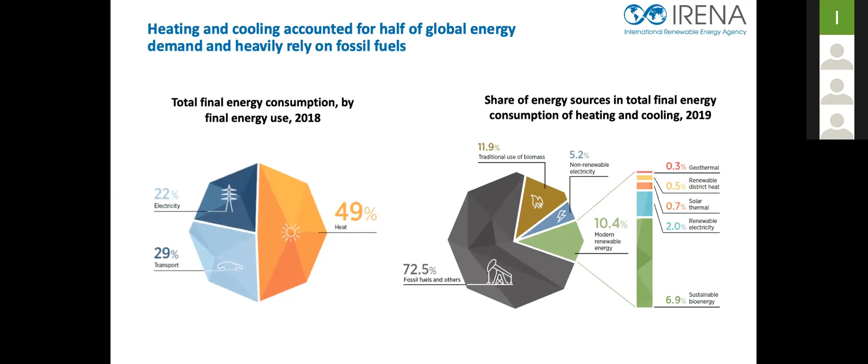Next slide please. The world must work together to prevent and minimize the negative impacts. So the largest emission reduction is needed for industry.

From the slides you can see, from a global perspective, to generally decarbonize the global industry sector would need improvement of energy efficiency, electrification of appliances, and direct use of renewable heat such as biomass, geothermal, and solar heat, and hydrogen for very high temperature industries, and also other measures for hard-to-abate heavy industry. Next slide please.

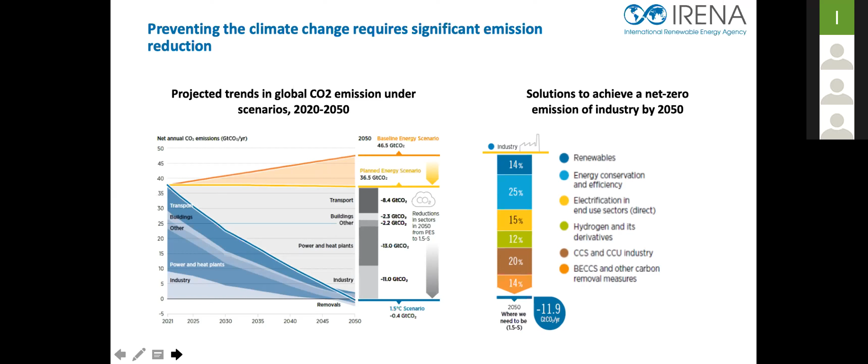At the global level, the industry sector accounted for 40% of total final energy consumption. This share can be different depending on the country context. For example, industrial energy consumption can be very low in European countries, but remains very high in countries with very rapid industrialization. In Vietnam, more than 53% of energy was consumed by the industry sector in 2019, before the pandemic, and the share will keep increasing in the following decade.

So with 40% of global energy consumed by industry, heat consumption contributes around three quarters of that. The rest, one quarter, is electricity. Again, as you can see, fossil fuels provide more than 87% of the total industry heat.

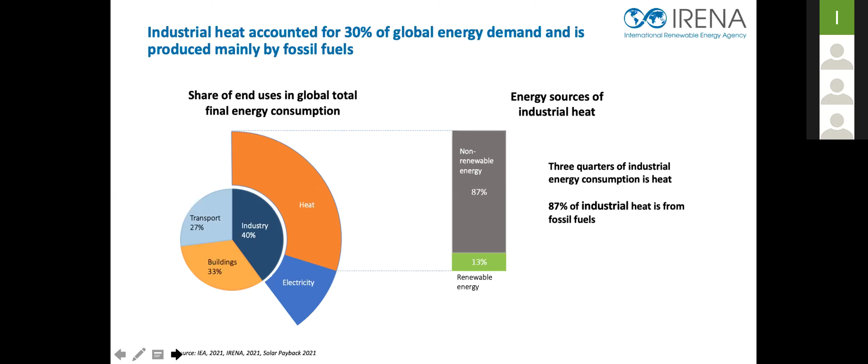Next slide please. More than half of industry heat is actually low and medium temperature heat needs. Here we define all heat demand below 150 degrees as low temperature heat. This could include boiling, sterilizing, cleaning, drying, washing, bleaching, steaming, and others.

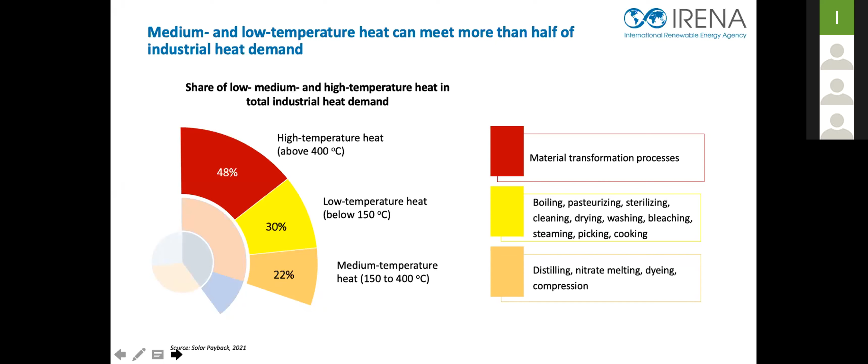And heat needs between 150 to 400 degrees we call medium temperature heat demand. This could include distilling, dyeing, and compression. All heat needs more than 400 degrees we categorize as high temperature heat needs, but this part very much focuses on material transformation processes such as steel and cement industries.

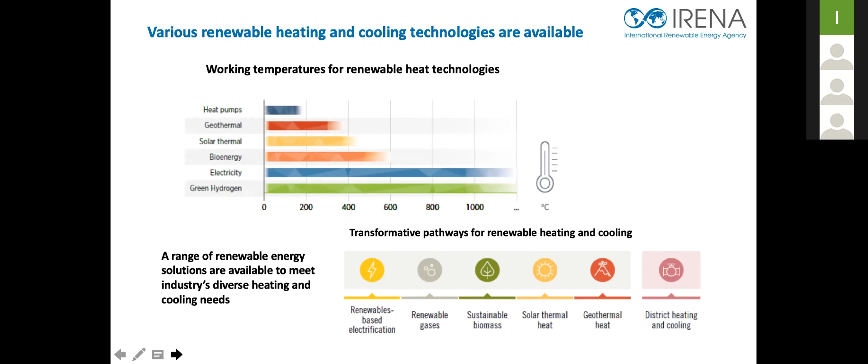Next slide please. Various renewable energy technologies can be used to replace fossil fuels for low and medium temperature heat. IRENA last year identified 5 key pathways from the global level to decarbonize heating and cooling energy use for both industry and residential. Those 5 include renewable energy-based electrification, renewable gases and sustainable biomass, which is very important here, solar thermal heat and geothermal heat, and also district heating and cooling as key infrastructure.

Next slide please. I would like to very briefly introduce 3 key technologies but will not go into great detail. The first is heat pumps. Heat pumps are a very energy efficient technology.

For example, a heat pump with a coefficient of performance, usually a COP of 4, can consume only 1 kWh of electricity but generate 4 kWh of heat. So it absorbs 3 kilowatt-hours of energy from ambient heat, which could come from air, ground, or even water. In some cases, the heat pump can utilize industrial waste heat or industrial wastewater, which saves cost and improves efficiency.

However, the operation cost of heat pumps very much depends on the electricity tariff and requires necessary policy support, which I will mention later.

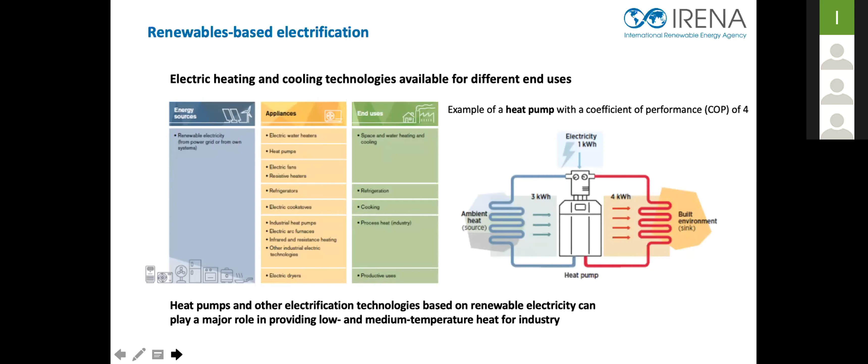Next slide, please. A very important option is sustainable bioenergy, especially for countries and cities with available sustainable biomass feedstock. Some widely used technologies include biomass plants combining heat and power, and biomass boilers. In some cases, for industrial parks and area level, biomass-based cogeneration providing power and heat, or trigeneration providing power, heat, and chilled water, can be a good option to decarbonize the whole area with lower operation cost compared to other renewables.

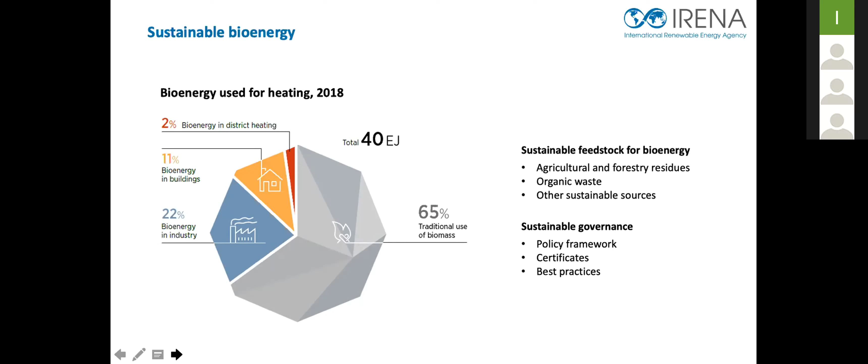However, all biomass use should be based on sustainable feedstock. For example, we recommend utilizing agriculture residue, forest residue, or organic waste. With biomass use, always keep in mind we should minimize negative impacts such as air pollution from burning, and also biodiversity loss, deforestation, or pollution on soil and water.

Next slide, please. Solar heat is another option where there is large potential of solar radiation. Large-scale solar water heating systems can be combined with other solutions to achieve better efficiency and performance. For example, the solar water heater system can be used for preheating and combined with the heat pump to maintain the heat needs for industrial plants.

Based on some analysis by the Asian Development Bank on existing solar heat for industrial process projects, like in China, the analysis found that investment in solar heat projects is less than biomass plants, and the heat production cost is lower than natural gas. Operation cost of solar heat plants is much lower than other renewable options.

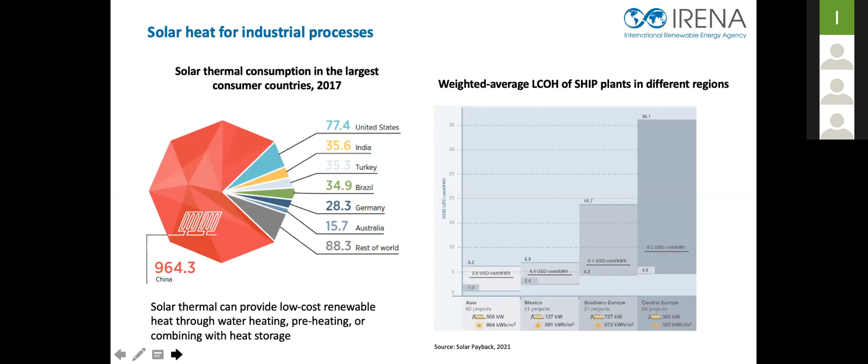Especially if you look at the right side, in the Asia region, the heating cost of existing solar heat for industrial processes projects is much lower than other regions, and it's keeping down. But always keep in mind, commercial level solar heat for industrial projects usually need combination with other technologies to keep steady heat providing, such as electric boiler or heat pumps.

Next slide, please. Companies always need to consider the infrastructure before investing in specific renewable technology, because long-term planning and considering the infrastructure will be necessary to avoid stranded assets. For example, if there are already natural gas networks and sustainable biomass feedstock are very available, replacing natural gas with biogas or biomethane and utilizing existing gas pipelines may be a better option than building a whole new system.

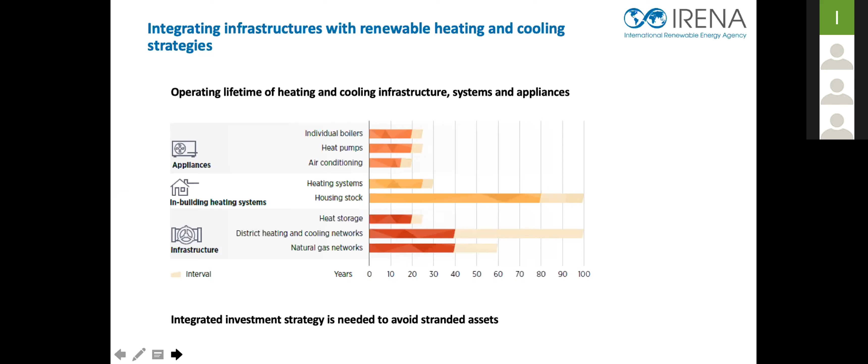Next slide, please. There are 3 models to procure renewable heating and cooling, but in Vietnam and most developing countries, the most common way may be self-generation - that's the only way we can have. In this model, companies need to build their own biomass boiler, heat pumps, or solar water heating system, usually combined with a storage system for self-consumption. In this way, you always need to consider the upfront cost of the system.

But when the market is growing at some stage, companies may also be able to purchase renewable heat or chilled water from utilities, or even renewable certificates, like what we do for renewable electricity.

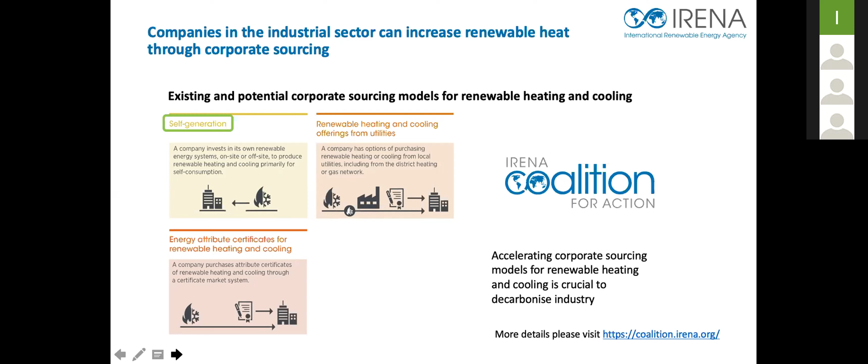Next slide, please. Even with all these technologies available, renewable heating and cooling remain very low because of existing barriers. The barriers companies usually face include, first, being locked in fossil fuels. For example, a company just invested in a very efficient new natural gas heating system, which can last around 25 years, even longer. So for the next 25 years, this company is locked into fossil fuels, the natural gas.

Other barriers also include high upfront cost, lack of access to finance, few reliable and available technologies on the market, or long and complex government approval processes. Government policy is necessary to enable and accelerate the deployment.

Just to give one example, as I mentioned, heat pumps will be very important at the global level for future decarbonization of industry heat. Heat pumps using renewable electricity are very efficient and low carbon. But the government needs to provide enabling policies, such as time-of-use electricity tariffs and proper mechanisms to enable companies to purchase renewable electricity.

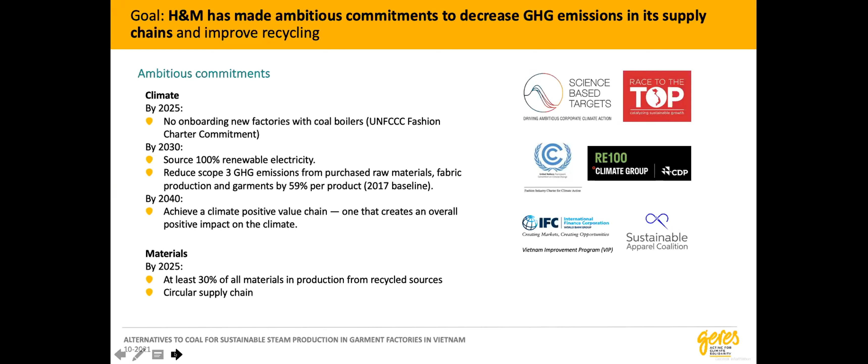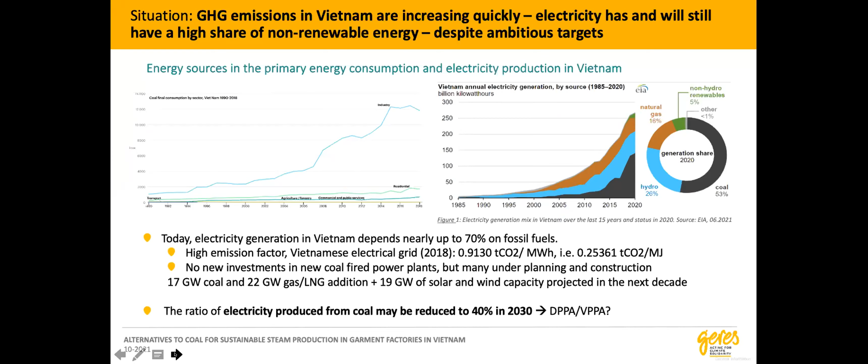This is the big picture that you all know, so let's not spend too much time on it. Coal consumption from industry has been rising quite fast in recent decades, and the electricity sector is taking strong commitments to decarbonize, but it's not going to happen tomorrow, and it's not going to be total. So electricity is a good option, but we have to remember it won't be fully clean tomorrow.

Next slide please. We know in more detail that a large part, about three-quarters, of the energy consumed by industry in Vietnam is also for heat. What we saw reviewing the boiler landscape in Vietnam is that in the garment sector, we mostly have coal, biomass, and also oil and fabric waste boilers. Electricity is a bit more marginal, so coal and biomass are much more present.

Vietnam has high resources of coal, especially anthracite, which is mined in the north, but they also import a lot of coal from Indonesia and Australia. In our research sample, 80% of factories produce steam from coal. All the factories we studied produce only steam, and even though they need hot water, they inject steam to produce it. So we had only steam production from either coal or fabric waste—that was our sample.

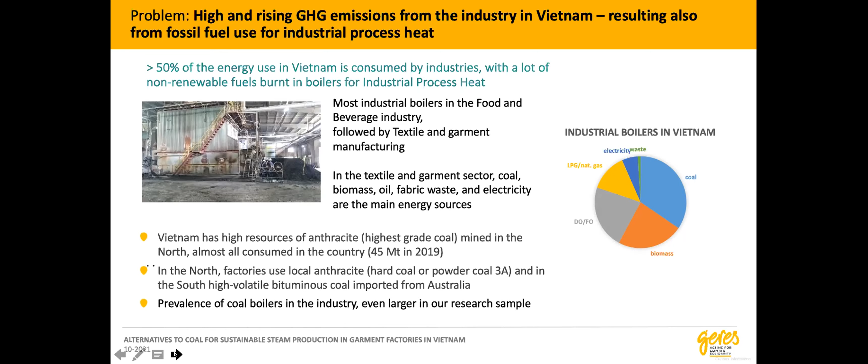Next slide, please. Let's not spend too much time on the process, but I want to highlight that we conducted this study during the lockdown, so we could not visit all the factories. There were a lot of phone calls, and only a few interviews done in person—most of the job was done through phone calls from Cambodia, Vietnam, or Taiwan. That is a strong limitation, and we are very open to all comments and suggestions because we know it's a significant limitation.

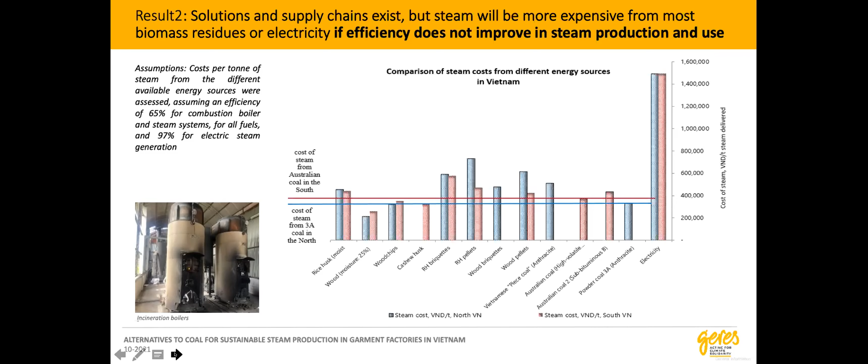So again, it is about the sample. In our sample, we had factories with very high needs of steam and others with low needs. We had 3 to 4 factories that had a large use of hot water for washing and dyeing at different temperatures. And most factories had relatively new boilers.

So we're facing the challenge of making the decision of investing in new boilers. We had only one factory with very, very large boilers that has already amortized. We really hope it is an opportunity for them to move forward and investigate what they can do in investing in new boilers.

What was also surprising for me is that we did not observe any co-firing process in any of the factories, because the first step, the easiest step, is to mix biomass with coal, and that would reduce your emissions already. That's also a good way to get familiar with your biomass supplier, to see what has the appropriate quality, what is the reliability, how the prices are going to vary along the year. So we were surprised there was no initiative just to try it, just to start reducing greenhouse gas emissions and to start understanding how the biomass supply can work.

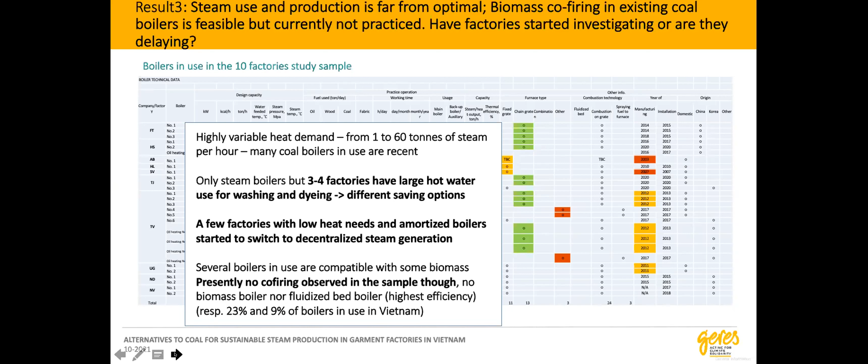So the challenges are on investment, because if you want to mix biomass and coal, you can usually do it in your coal boiler. But if you want to switch to 100% sustainable biomass, it may require investing in expensive boilers. I just want to say very briefly that, generally speaking, a good biomass boiler is not necessarily more expensive than a good coal boiler. You have different technologies, but you also have different technologies for coal, and the most efficient are generally also the most expensive - but it's the same challenge as for coal.

So our recommendation would be not only to try to reach the highest efficiency with the boilers themselves, but also to have a look at the use of the heat, because in some cases, doing everything through producing steam and using the steam either for ironing, or to produce hot water, might not always be the most efficient option - it depends, sometimes it is. But mostly we see that many factories still haven't optimized the use of heat. They have a variable load, and sometimes they produce heat in a more or less constant way, even day and night. So there is already much to do in saving heat and producing less, and then you can afford maybe a slightly more expensive fuel that would be sustainable.

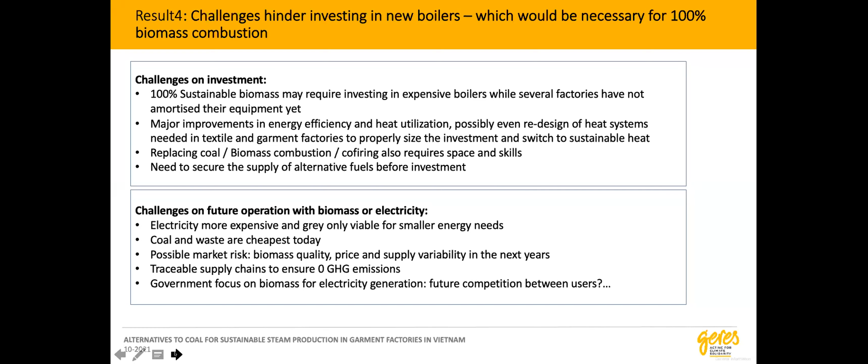So those were the different options we were seeing for a switch to sustainable heat. First, co-firing as a first step, then burning biomass residues in incineration boilers for factories that were using fabric waste. Decentralized electric steam production can of course be combined with solar PV or with any kind of PPA, even distant PPA. Solar heat, I think, was very well introduced and explained by Mr. Jinley, so I'm not going back to this question, but of course it would be great to see more pilots in the garment sector using thermal heat as well.

Of course, when you do such a small study, you see many options and ways for more research and more action to understand better and guide further action. We really encourage factories to conduct an assessment of their heat use, steam production system, and steam distribution. And we really encourage close monitoring of any change when they switch to decentralized electric steam, or when they introduce water recuperation, water reuse, or hot water recycling, to really document how much they can save through these different switches.

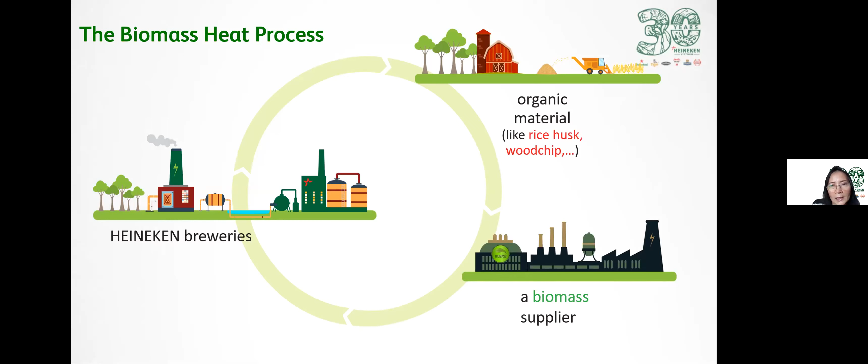Quy trình sử dụng nhiệt năng biomass tại nhà Heineken Việt Nam khá đơn giản. Chúng tôi sử dụng chủ yếu là vỏ trấu và wood chip, những vụn gỗ, đây là hai nguồn chính. Sau khi nguyên liệu hữu cơ này được chuyển giao cho nhà máy biomass thì nhà máy sẽ sử dụng để tạo ra heat, và hơi này sẽ được truyền qua đường ống để đến nhà máy bia Heineken Việt Nam.

Hơi này được dùng ở nhiều công đoạn khác nhau, như nấu bia hoặc khử trùng. Đối với Heineken Việt Nam, việc sử dụng nhiệt năng biomass sẽ đem lại những giá trị cho cả kinh tế, xã hội và môi trường.

Về xã hội, chúng tôi đóng góp tăng thêm thu nhập cho người nông dân cũng như cho các nhà buôn vụn gỗ. Về môi trường, sau khi sử dụng nhiệt năng biomass đã giúp giảm tới 50% khí phát thải CO2 của các nhà máy chúng tôi. Còn về kinh tế, khi chúng ta cùng chung tay phát triển một nền công nghiệp năng lượng tái tạo thì rõ ràng chúng ta sẽ tạo thêm thu nhập cho nền công nghiệp này.

Và đây tôi xin chia sẻ những cơ hội cũng như những thách thức khi cụ thể là Heineken Việt Nam trong vấn đề sử dụng nhiệt năng tái tạo, nhiệt năng biomass.

Cơ hội thì chúng ta đã thấy ở phần chia sẻ trước đây, biomass là một nhiệt năng khá dễ sử dụng tại Việt Nam. Nhìn chung là bởi vì thị trường có sẵn, công nghệ có sẵn, nguồn nguyên liệu của biomass cũng có sẵn, giúp giảm thiểu CO2. Và cái risk đó, như bản phân tích của người chia sẻ trước tôi cũng nói, chỉ trong phần đó chúng ta nhìn thấy tất cả các mục đều là màu xanh, chỉ có phần risk là màu vàng thôi.

Cho nên việc sử dụng nhiệt năng biomass là một cơ hội rất lớn sẵn có ở Việt Nam, và đây cũng là một giải pháp rất tốt để các doanh nghiệp đạt được chỉ tiêu, đạt được tham vọng về năng lượng tái tạo của mình. Tuy nhiên chúng ta cũng có những mô hình nhiệt năng sử dụng năng lượng tái tạo khác, nhưng rõ ràng biomass hiện nay ở Việt Nam vẫn là cái mà chúng tôi cho rằng hấp dẫn nhất và hiệu quả nhất.

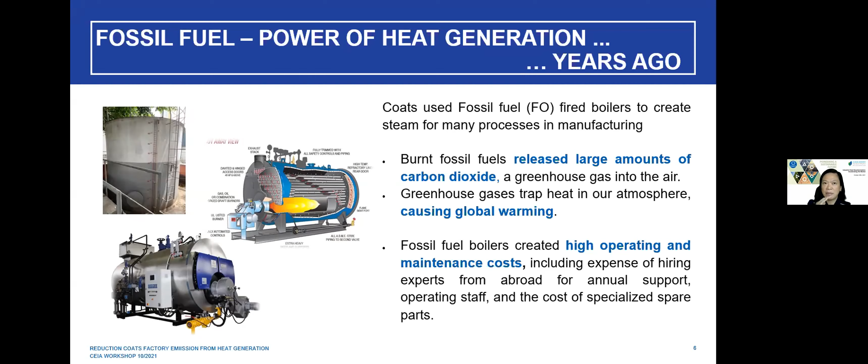Now let me take you back 7 years, when Coats used fossil fuel to generate steam. I think all of us here are interested in the environment - we know that burning fuel releases carbon dioxide, a greenhouse gas, which gets trapped in the air and causes global warming and rising sea levels. Looking at this, it also involved a lot of operating costs, maintenance costs, and the challenge of controlling and reducing emissions harmful to the environment. It was really a headache for us.

Then we thought it was time for us to focus more on sustainability and protecting the environment. We wanted to do something in Vietnam, where we have big factories in Hưng Yên and Ho Chi Minh City. For the challenge Ms. Mỹ already shared in detail previously, we knew what we needed to achieve - reduce emissions - but a lot of questions arose at the time, because in 2014 there weren't many options or much availability for us. We had questions related to CAPEX or OPEX, technical support, space, and justification for reducing the carbon footprint.

I also saw quite a lot of questions about how we define biomass as a renewable energy. When we calculate, we see that carbon dioxide released into the air from biomass versus from fuel is quite similar for the same ton of steam produced.

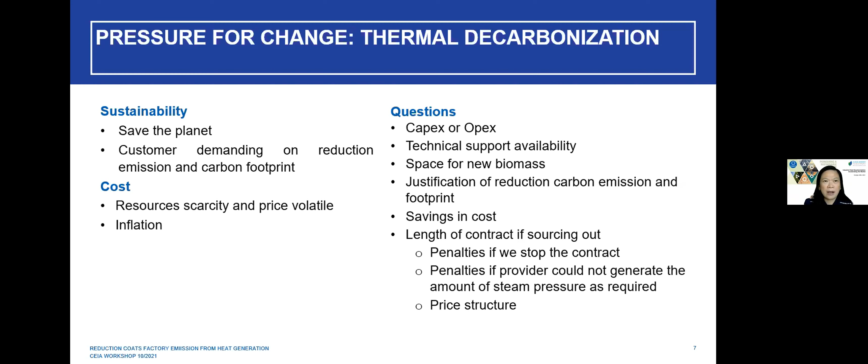However, if we look at circularity of biomass and fuel, it's quite different. It took us about 1 year searching for the solution and who could supply for us. Luckily, we found one company called Trau Viet.

I think when you look at the name, you know what material we are using here: it's rice husk. We see that rice husk is renewable and near carbon neutral, and it's massive in Vietnam because we are the largest or second largest exporter of rice in the world. It also had quite a lot of challenges about the long-term contract, but finally we partnered with that supplier.

They also handle everything for us; we just need to manage the expense. The most important thing I see here is that it takes a lot of investment for them, so we need to share our projection or forecast so they can prepare to meet our demand.

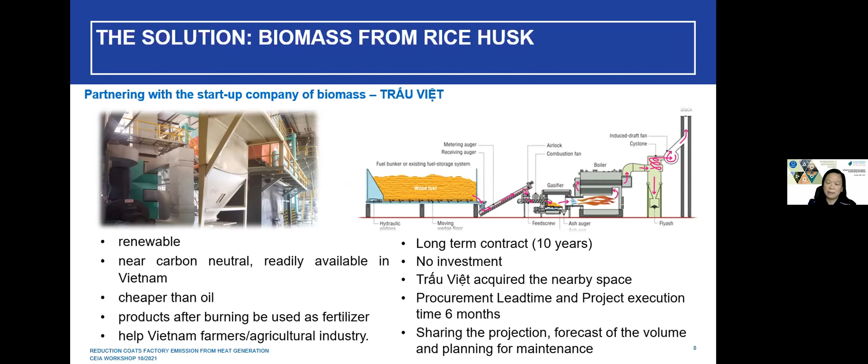Then we are thinking of biomass as a replacement for fossil fuel. It's just a replacement, but looking into sustainability, we need to think about reduce or reuse. So now I'll take you through another thing we are doing for thermal decarbonization: reusing our heat from the dyeing process.

I think our scale for this may be small, but for garment manufacturing, like Peter or Odette mentioned before, it will be huge. We utilize the heat from the dyeing process to heat the fresh water, and based on that, we reduce the heat energy needed for the dyeing process next time.

It also helps us reduce the heat for the water going to the water treatment plant, and again reduce the energy for cooling water. So we can see that by utilizing the heat from the previous process, we save a lot of energy and reduce emissions to the air.

In summary, the projects we have going on just clear the myth for us that sustainability is costly. Sustainability for the environment is sustainable for the business. We can see what our company, or your company, will earn: enhanced reputation. You feel pride because you are doing the right thing, and also associated savings. In the case of biomass, we are saving about 40% compared to before.

We also feel proud because we have contributed to a clean environment, and we help farmers and the agriculture industry in Vietnam. For the brand and consumer, we're proud that we participate in the supply chain, and the customer feels that they have a reliable and sustainable supplier. In the end, it's for the planet, and we can save this beautiful planet for the future generation.

So that's all for my presentation and sharing today. Now I'm open for questions you can raise in the next session.

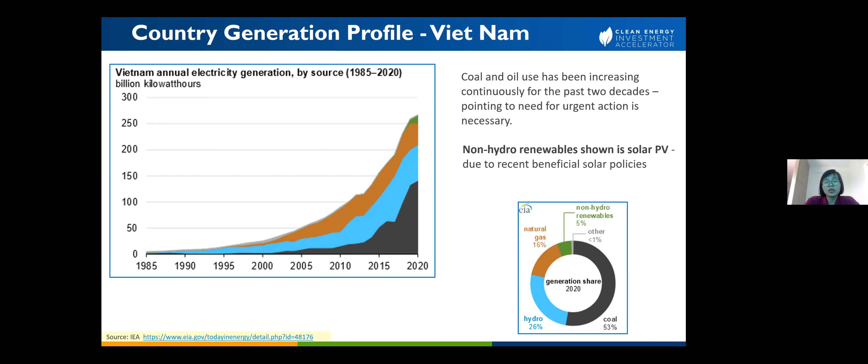If you've seen our previous speaker mention the power generation profile of Vietnam, in the graph on the left you can see the fuel source mix of energy for electricity in Vietnam. This mix could be different from what the factory is actually burning for their industrial thermal process. This mix usually indicates the fuel choice for the factory from the generation source, whether electricity or heat. This energy mix also helps us explain the current economics and impacts of the current national policy on power generation, and helps identify opportunities for new policy to support more sustainable biomass conversion for Vietnam.

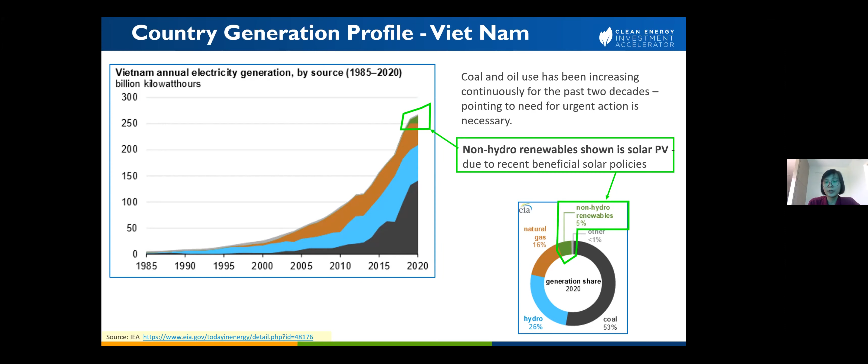As you can see in the graph, there was a very short period of solar boom in Vietnam, but it only accounts for a small portion of the whole energy mix. So this could open the door for new policy to support more renewables and biomass in Vietnam.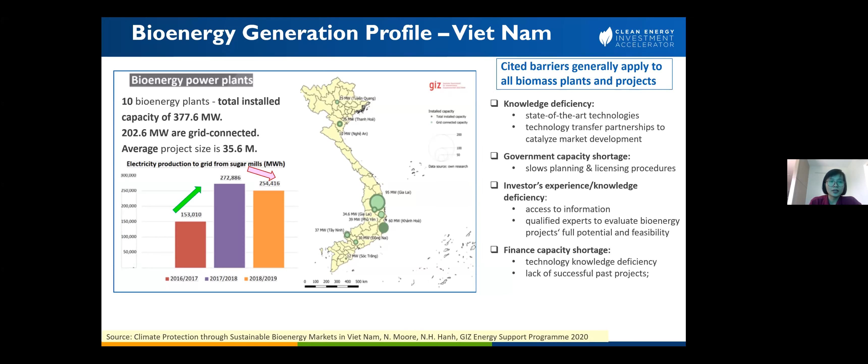Next, we'd like to show you a brief of the biomass market supplies we studied in Vietnam. One interesting key factor is that the relative concentration of rice mills in the Mekong Delta is quite close to the supply source of the coal-fired boilers at the factories.

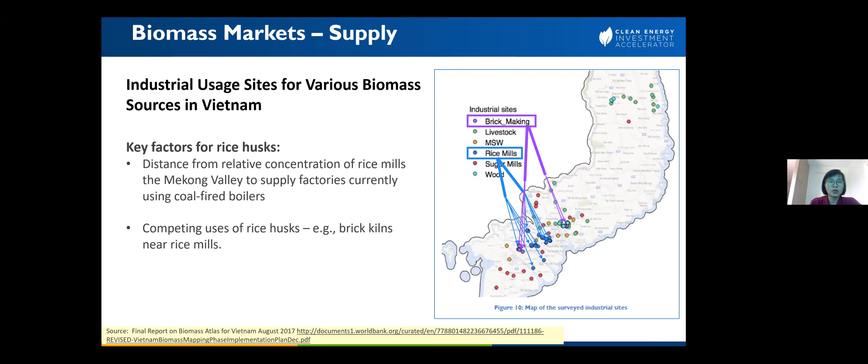But at the same time, there's another potential, or actual, source of use for the biomass - brick making. The so-called brick kilns are also located close to the rice mills, obviously to keep their costs down. So there's a potential, or actual, competing use of rice husk in this sense. The study found that 40 to 60% of the available rice husks are used by brick-making factories in the Mekong Delta - that's one of the highlights we want to show through this study.

Next slide - this is another interesting study we want to share with you. Basically, when looking for opportunities in bio-waste, it's important to differentiate between the potential waste stream and the actual processed products that can be used at the factory.

So the rice husk availability is directly correlated to the rice crop production. No surprise, if you have 3 annual harvests at a field, it will produce more rice husks than if you have just 1 or 2, lending itself to greater market stability and product availability.

We can see from this aerial graphic, the green shaded areas represent irrigated triple cropped rice farming. The yellow and tan areas are both double cropped. The tan are watered through irrigation and the yellow rely on rain.

In the marketplace, it's challenging and expensive for rice husk suppliers to store a lot of rice husks over long periods of time. It must be kept dry and its value will decrease when the next rice crop is harvested. Seasonal price variability is expected if you're doing just ad hoc purchases.

Also of interest to note, in the 2007 study, 50% of the rice husks were produced in the Mekong River Delta, about 20% in the Red River Delta to the north, and the rest were scattered throughout the country. In the north, the Red River Delta area, most of the rice is single or double cropped. The winter temperatures are too cold for that 3rd crop.

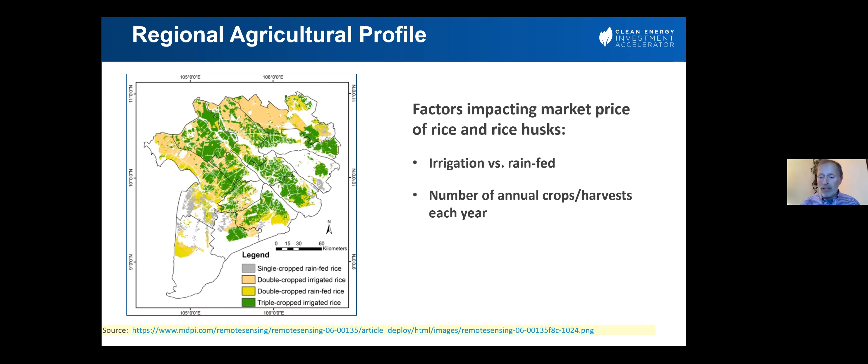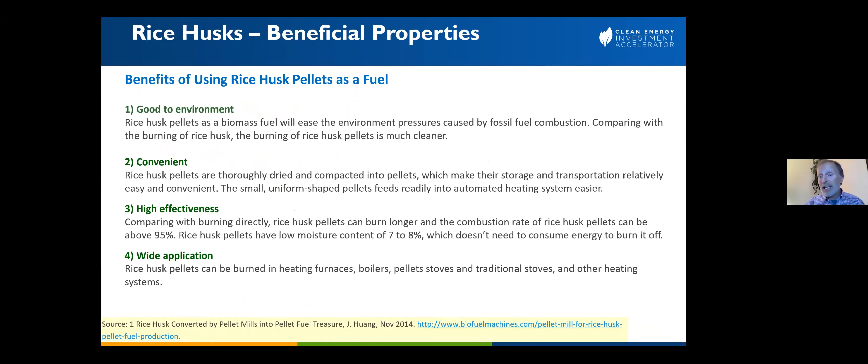Just taking a simple look at the benefits of rice husks: it's much better for the environment than coal. It's a convenient fuel, readily created when processing the rice food product. And when dried and pelletized, it's an effective fuel and it works well in a variety of furnace, boiler, or heating systems.

We did a market survey, talked to a lot of suppliers directly, and some of the highlights: they weren't worried about any risk of rice husk shortage or wood chip shortage across Vietnam in the near term. In the south, the concentration of rice mills is higher than in the north because more rice is grown, giving greater availability of the rice husks.

Costs varied quite a bit with suppliers, from $110 to $190 per ton, depending on the type of pellets or briquettes and the season. Price trends have generally been increasing since 2017, maybe due to more use in rice paddy drying at the production facilities, or also some of the people talking today said they're using it in their factories as well. So that could be the cause, but we couldn't find real confirmation of that.

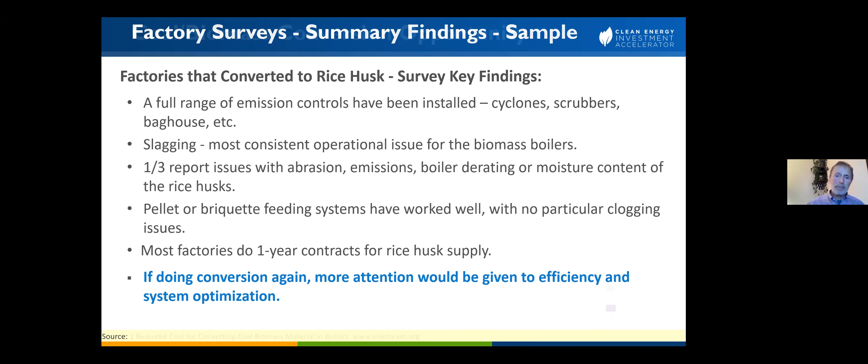We didn't have all the data we needed to do a full life cycle cost assessment to determine how much the biomass boiler purchase would impact operating the factory and its costs. So we decided to use the results from the study to get at least a perspective on the impact of those equipment costs. First we looked at the hours of operation. In a typical US factory, it might be 2,000 hours a year, but these supply factories are operating 24 hours a day, 6 days a week, nearly 7,500 hours a year - 3.6 times more than the average factory.

So then we said, well, okay, what if we took this cost - and we know normally in accounting you would amortize it over time. We said, how about if we break it down: cost per year, then cost per day, and cost per hour, and then compare it to the fuel cost. So in essence, I've taken a capital cost, and by breaking it down to its hourly rate, it now looks a lot more like an operating cost.

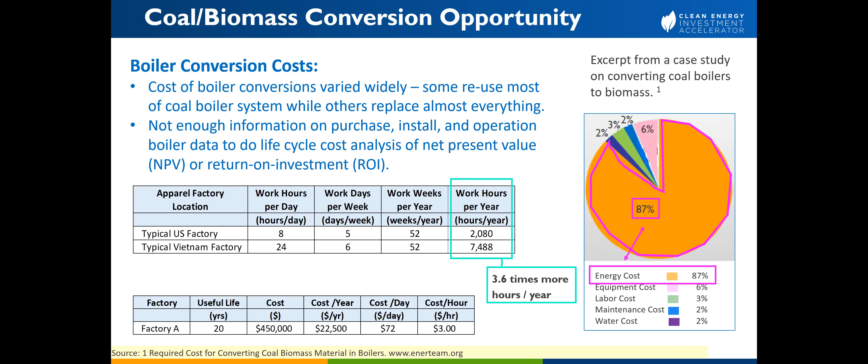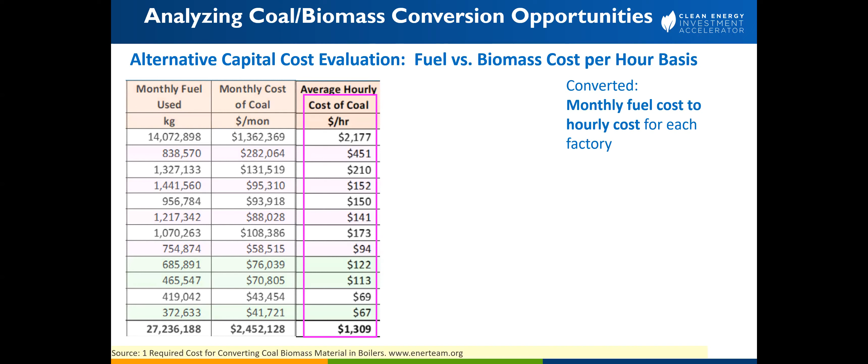And like I said on the previous slide, we took what the cost of the biomass equipment was on an hourly basis. Now as we compare these two, you can see the cost per hour for the fuel is huge compared to the cost per hour over a 20-year useful life of the biomass equipment. So it certainly dwarfs the impact if you spread it out over the full life. Now, this isn't exactly an apples to apples comparison, and it's not the only basis for making decisions, but it does highlight looking at various ways of assessing cost with processes.

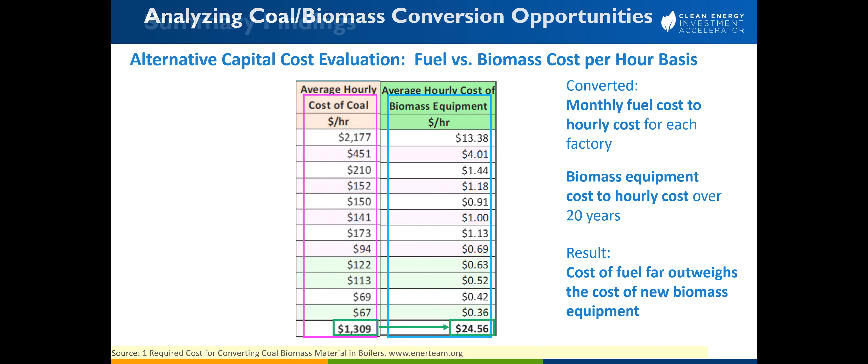Some of our summary findings - we did a lot of different research, with surveys from factories that did the conversion and then with suppliers, et cetera. What we found is if all of the factories were to convert, the emissions reduction would be 702 kilotons of CO2 equivalent per year. Nike doesn't get all of the product from these factories - their share would be 261 kilotons CO2 equivalent per year.

For factories that operate 24/6, the CapEx cost of new biomass boiler equipment is relatively small compared to the cost of fuel, as we illustrated on that previous slide. There are very large quantities of rice husks available and generated every year, but it appears from our studies that maybe 60 to 80% already have current uses.

So trying to obtain them would probably cause some sort of bidding war. Market stability is determined by rice husk availability, which is impacted both by the rice harvest and the number of annual crops. And then the market price is influenced by the rice husk availability and the competing uses.

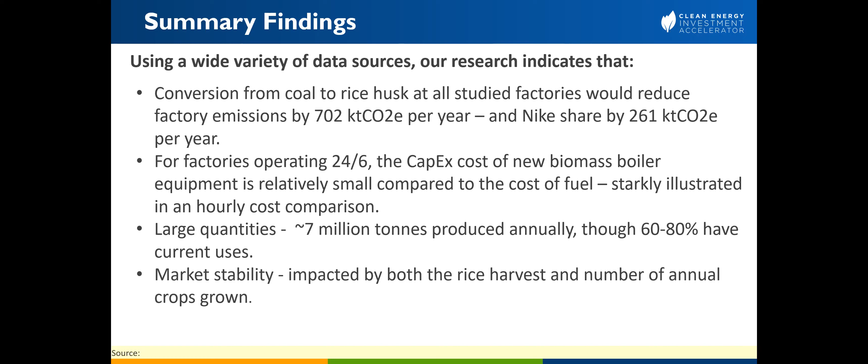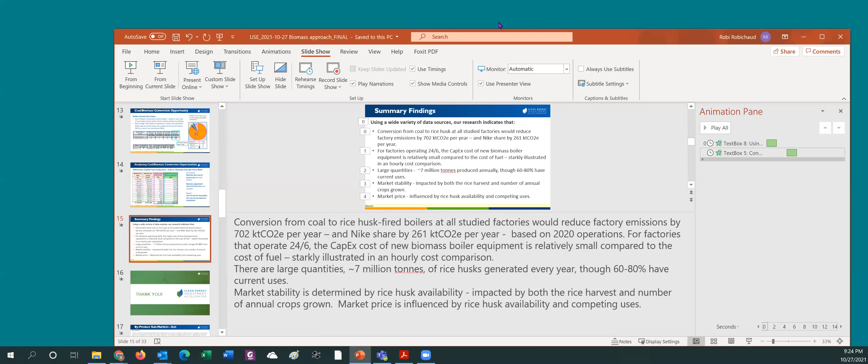Let's see if we're all back.